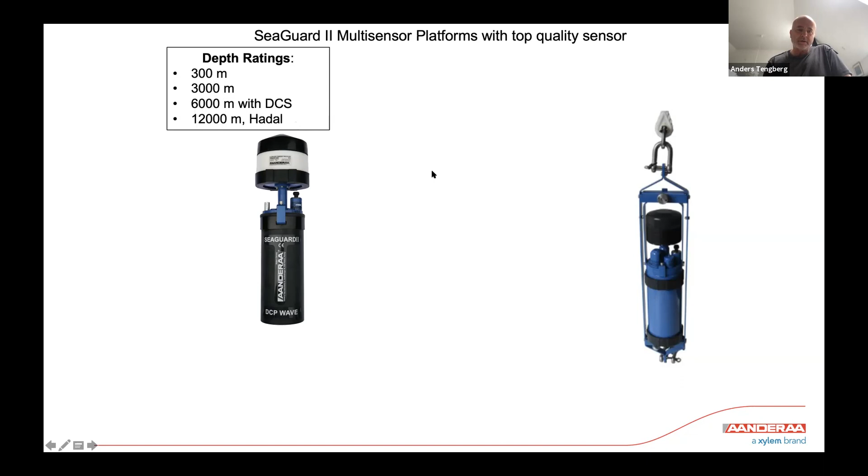There are different depth ratings depending on the pressure cases, and we have 300, 3000, 6000, and then we have a special version which is for Hadal, so it's down to 12,000 meters. We are involved in several really deep trench work projects at this time.

So if we look first at the Doppler current profiling sensors, we have a Doppler current profiling sensor, which I have discussed in a previous webinar when we looked at selecting the right methods for current and wave measurements. It can measure currents in multiple layers above the instrument, in 150 cells, and you can program them to be different sizes. You can go from 10 centimeters by having overlap of the cells to 10-meter cells.

And the user can select whether to use broadband or narrowband. In the previous webinar we discussed this in more detail, and we could see that broadband is suitable to save power and gives you additional information in the measurements. But if you're working from a platform that is moving a lot in the waves, for example from a buoy, then narrowband is, as we have seen, a better option.

You can measure surface currents with it, and every single ping that it sends out is compensated for tilt and movement, and the instrument can handle 35 degrees of tilt without any degradation of the data.

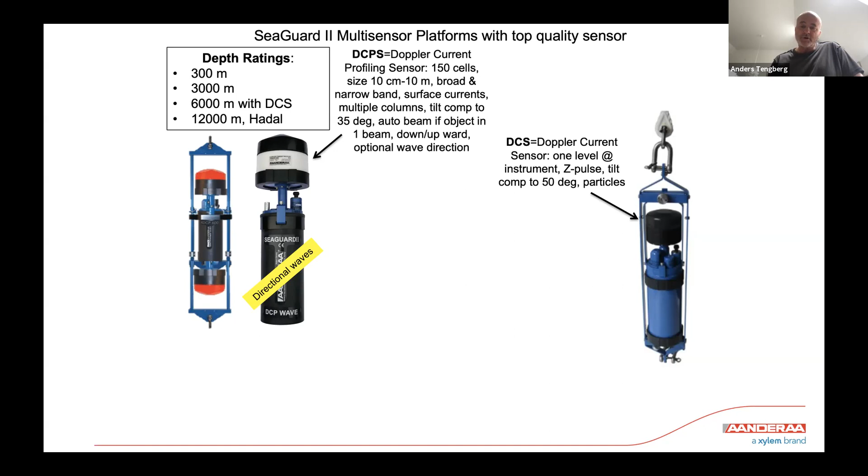And as with all our instruments, they are multi-parameter. You can add sensors. It's plug and play. You switch off the power, you add the sensors and switch on the power, and then it's ready to measure with the new sensor. And that gives the advantage, for example, that you can use the instrument to log sensors on a string. Here you see a shorter string laid out on the deck between deployments. I will show you one or two more examples of that.

And also these instruments can accept sensors from other manufacturers as long as they have an analog output or a serial output. The instrument can take 2 serial sensors and 4 analog sensors.

And I want to point out here what we are releasing this year. It's a series of new sensors which are relevant to the SeaGuard. For example, a new turbidity sensor which can be used on strings, with a 0 to 2500 NTU range. A new conductivity sensor with a factor of 100 or factor of 10 better absolute accuracy, and some new versions of the oxygen optodes, for example, trace oxygen.

And we have one software which is called Real-Time Collector, which handles all our instruments and sensors. So you connect to this software, and then you are able to set up automatically. The software will recognize which sensor or instrument is connected, and you're able to set it up. And we also have features for real time, where you can transmit compressed data, and you can select which data to store on board and which data to transmit. So a very efficient way of sending data in real time.

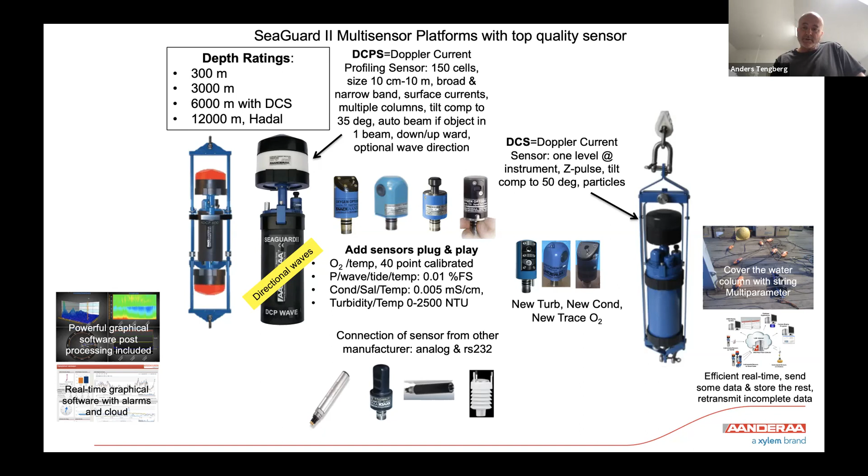And with the instrument comes powerful graphical software, which is included, where you can make different 3D and 2D plots and line plots to have a good overview of the data and easily export them into other formats if you need to do more processing of your data.

Typically these instruments are used on moorings like this here, deep moorings, and we will see some examples of that. You can also have them in a bottom frame. This is typically used, for example, in port and harbor applications. If you want to measure directional waves, we recommend a bottom frame with a gimbal, because to get good directional waves with the acoustics, the instrument needs to be stable and not moving.

One feature of the SeaGuard instruments is that you can put sensors in different logging intervals. This can be practical if you run significantly different sensors on the same instrument. For example, you can put the pressure sensor in 2-second intervals if you want to detect small changes in the sea level, or small movements in the seafloor. I will show you some examples of that.

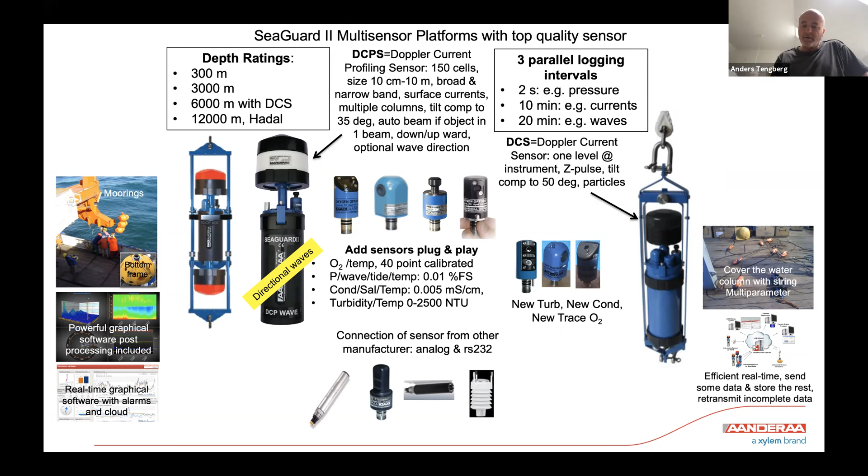And then at the same time you can have a current sensor which automatically pings maybe 150 times over 10 minutes, working by itself on a 10-minute interval, and then maybe you want a longer interval for the waves, and you can put that in a group with longer measurements. So you have three parallel groups with different logging intervals depending on what you would like to do and how advanced your experiment is. You adapt your data for your experiment.

So here are some examples of applications which I will come back to, but basically by having this you have a lot of possibilities of doing different types of measurements.

And here you may notice I've included also a wind sensor, and this is because now in several projects, several customers have a SeaGuard as a logger on a buoy. The SeaGuard logs the surface currents with the single-point Doppler current sensor, and below that the profiling sensor, and then it takes in an external compass to compensate for magnetic disturbances that you often have on a buoy, and also a wind or meteorological sensor which is connected by serial.

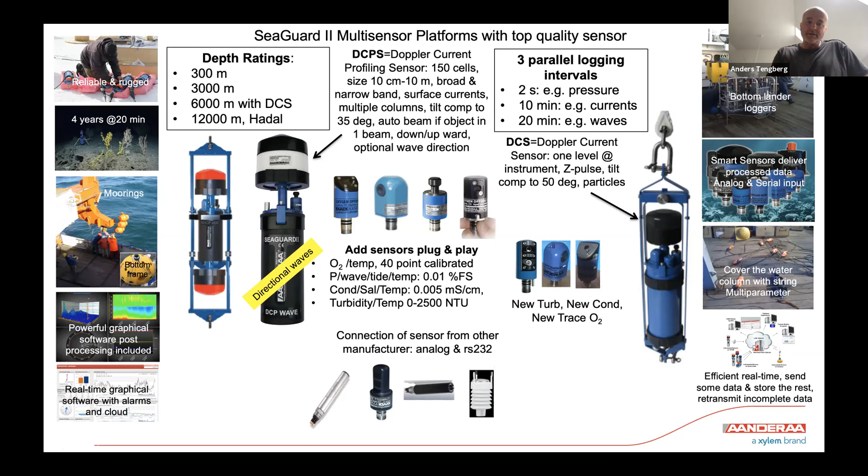So this is also a way to use this SeaGuard instrument, which is mainly, of course, made for underwater applications. So I will show you some examples of how these instruments have been used. I already showed you this project in a previous presentation about currents, but now I will present to you some new data that we just analyzed at the university.

And what we are looking at here is effects of ships, mixing from ships, and how it affects the environment, both in terms of spreading pollution, in terms of gas exchange between atmosphere and water, and in terms of mixing up through the stratified layers. Erosion we don't look so much on; that has been studied abundantly in other studies.

So here are examples from our field work last summer, where, for example, to look at the movement of the halocline, we use small CTDs before and after the ships. Here is an electrical ferry that just passed and we're measuring behind. Here is a big ship that goes between Copenhagen and Oslo in Norway that we also measure behind.

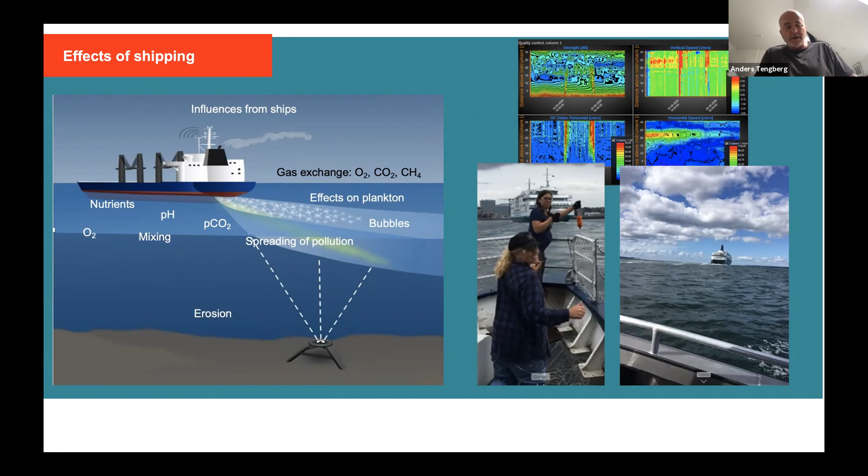So we want to detect the influence of ships, how the ship wake is spreading and how it affects the halocline. And so we deployed instruments here under the ship lanes. We had two Nortek instruments, one Signature 500 and here a Signature 1000 on a buoy. Below the Signature 1000 we had a SeaGuard 2 instrument in its mooring frame, deployed at about 35 meters below the surface and looking upwards, combined with the Signature 1000.

In this case we deployed under the north-going ship lane through a strait here between Sweden and Denmark. There are about 50 or 60 ships passing every day. And we also have ferries sailing about 1.5 to 2 kilometers further north, back and forth between Sweden and Denmark, one ferry every 20 minutes. Some of these are electrical. This one here, for example, is an electrical ferry that charges when it comes into shore.

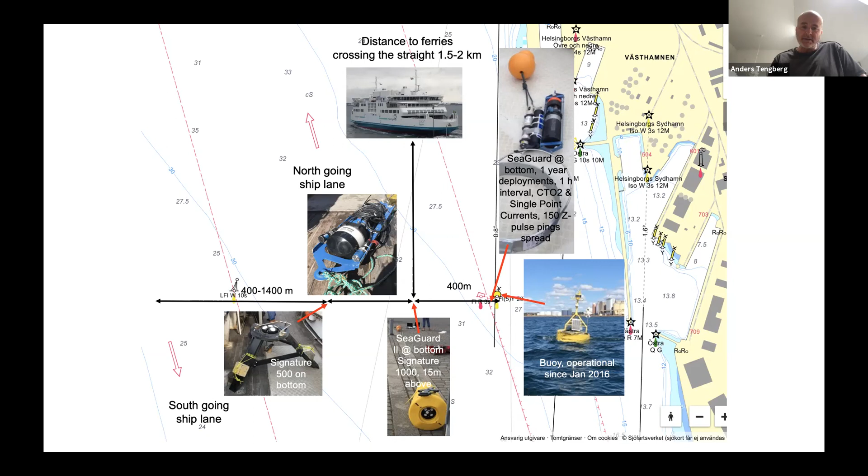So we want to detect ships. We get the AIS data, how the ships are moving, from the automatic identification system, and with that we can see when they passed over our instruments and how it affected the mixing. So here is just a background plot. This is using the freely available software with the instruments, the Data Studio 3D software, where I just make a plot over a couple of days. This is just 3 days. We deploy the instruments for several weeks.

Looking at different information here, for example the vertical currents, we can see the north speed. This is a strait which is oriented mainly north-south. You don't see the scale, but we can see the different layers and how currents are going during these 3 days. Here is the signal strength, the backscatter level from acoustic reflections from the profiler. We can see very strong echoes here. This is fish. We have big schools of fish, herring, moving in the sound. It's a rich area for fishing. There is no trawling here, so there's a lot of fish.

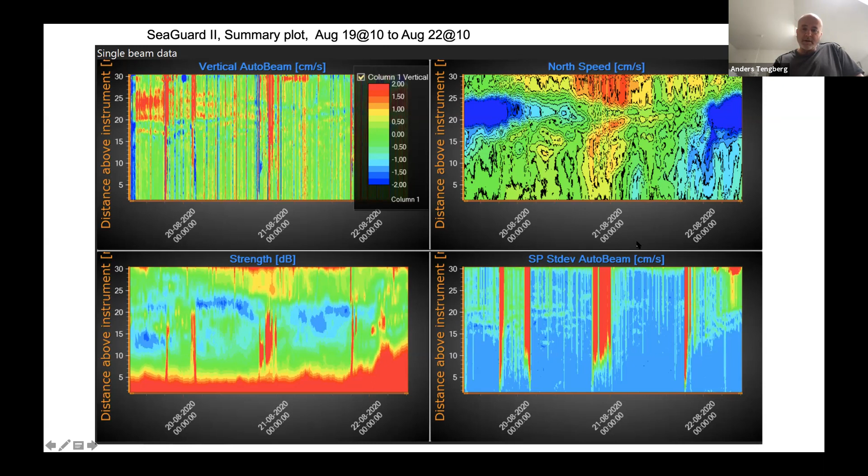And one parameter which we looked at a lot to see mixing from ships is the standard deviation of the horizontal speed. It is automatically calculated by the instrument. So after recovering the instrument, in 1 or 2 hours I made many of these plots, looked at the information, and had a good overview of what happened during the deployment.

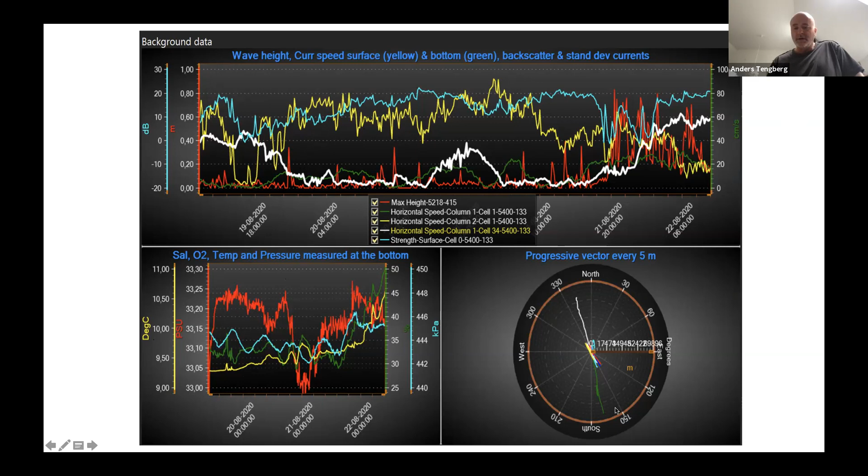In this case, the SeaGuard instrument also had a pressure-based wave sensor on it, so it measured waves. You can see it in red here. Wave height was, for these days, maximum about 0.8 meters. We had salinity measurements at several levels. We had oxygen measurements at several levels. And here you see the tidal measurements, pressure, temperature, salinity, and here are the progressive vectors that show the main currents in different layers are north-south. So this is the direction of the strait.

So if we look at this standard deviation of the horizontal speed, we want to see mixing and influences of ships. Can we detect the ships that are passing?

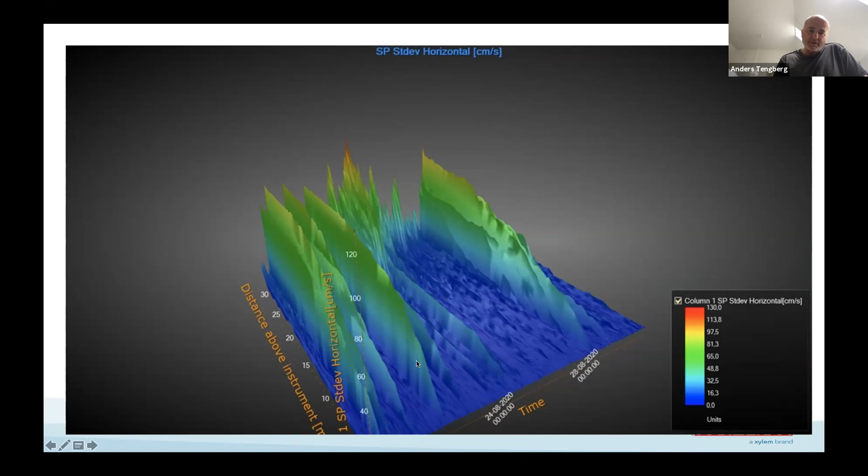Typically, if we make a 3D plot of it, we can see here going from the surface down to the bottom. Here is the time scale. If these are influences of the ships, they go to different depths. We can see here it goes to about 10 meters below surface, then it levels off. Some of these influences only go more shallow.

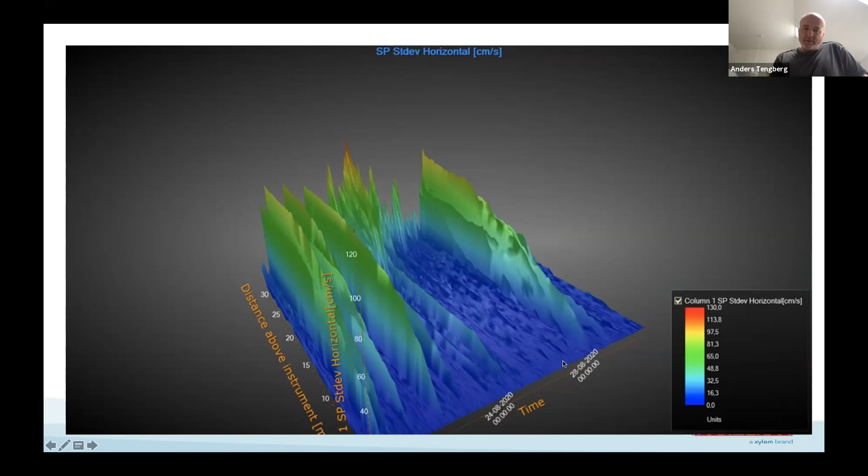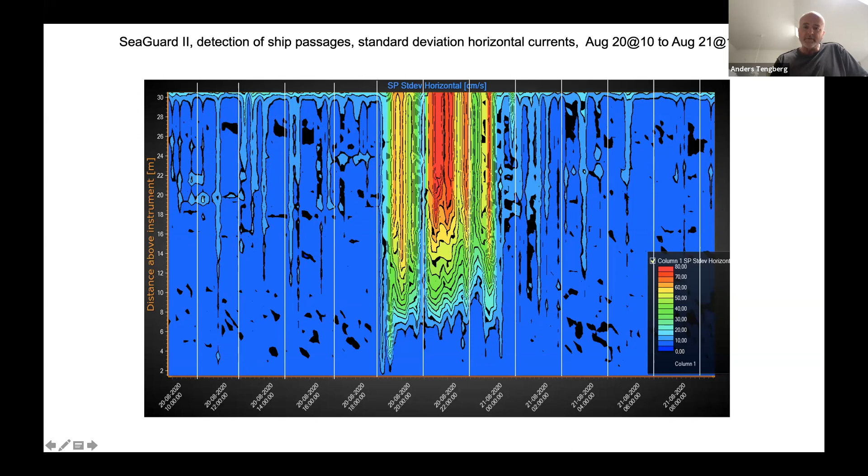And to our surprise, we could see ships, the ferries, for example, passing north of the instrument installation at 1800 meters, at 1500 meters. We could see the effects of these ships as well. So every single detection of such an anomaly in the horizontal currents, a turbulence, could be correlated exactly in time to a ship passage, except one actually. We suspect that this ship did not have the AIS on, because that one we didn't see.

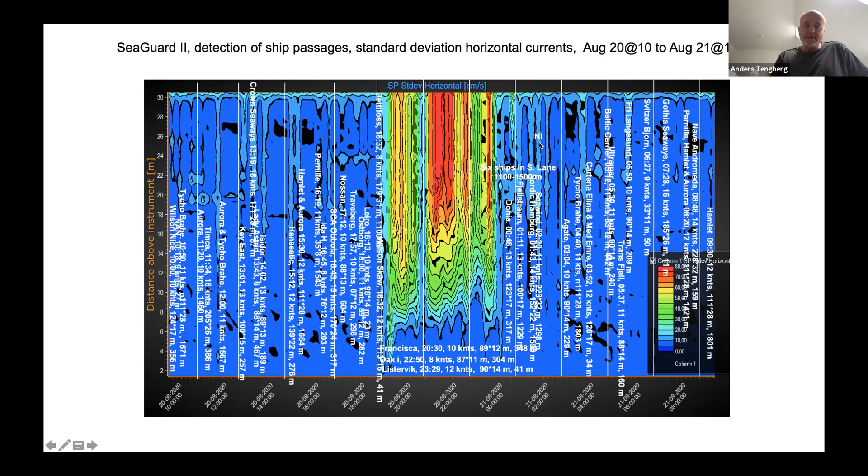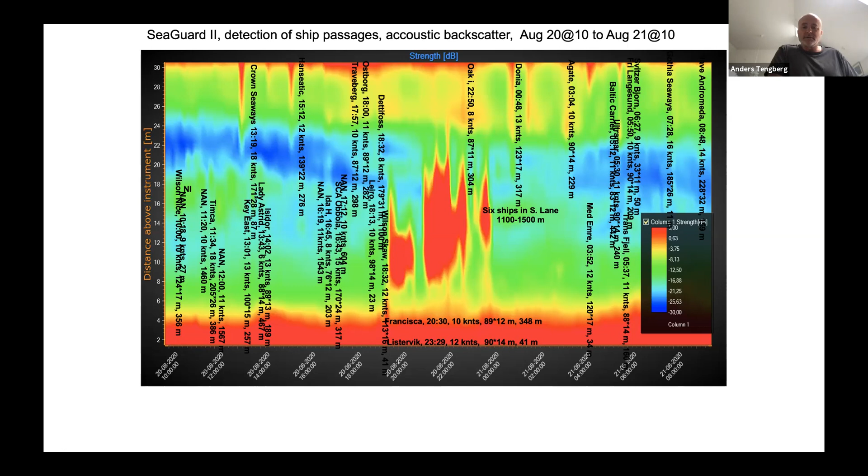If we then also look at the same thing, but directly from the signal strength, from the acoustic reflections, we see that ships that pass straight over the instruments or very close can be detected, and that's probably the bubbles from the ships that we see. So we could detect them, but only the ships that pass within 200 to 300 meters or so.

And in the next deployment that we will do this summer, instead of going out and doing a lot of CTD casts, which takes a lot of time and it's difficult to get good coverage, we plan to deploy the same instrument with a string of sensors. This is a string that we have available from an observatory that we have been running for the past 10 years or so, and that we have now recovered. Then we will get the halocline automatically measured, because the string has oxygen and salinity sensors on it.

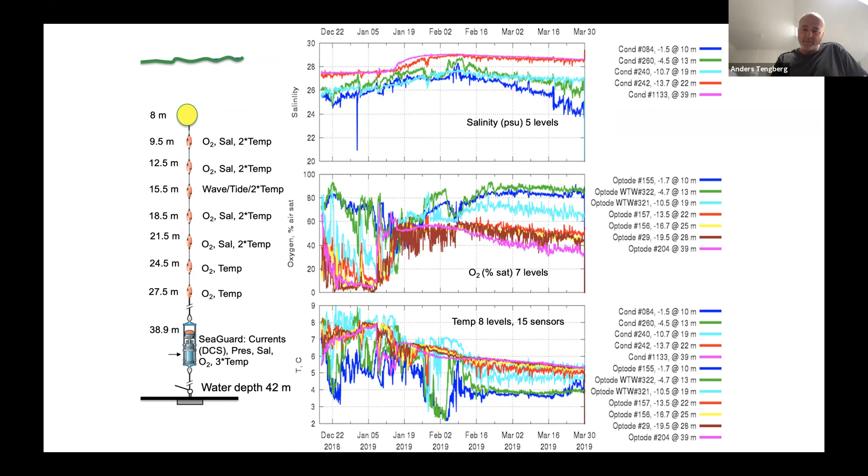So, combination of acoustics and other sensors we discussed in the previous project here, and one case where we combined sensors in a really useful way was this project I showed you in the previous presentation as well. That was combining turbidity with acoustic backscatter.

Here is a project where we look at effects of trawlers passing in areas where they dumped chemical ammunition, how trawlers resuspend the sediments, and how the fine particles from the sediments spread with the currents. Here we deployed two instruments like this, with bottom weights and the instrument in a frame with an acoustic release below and floats. This was at 200 meters depth.

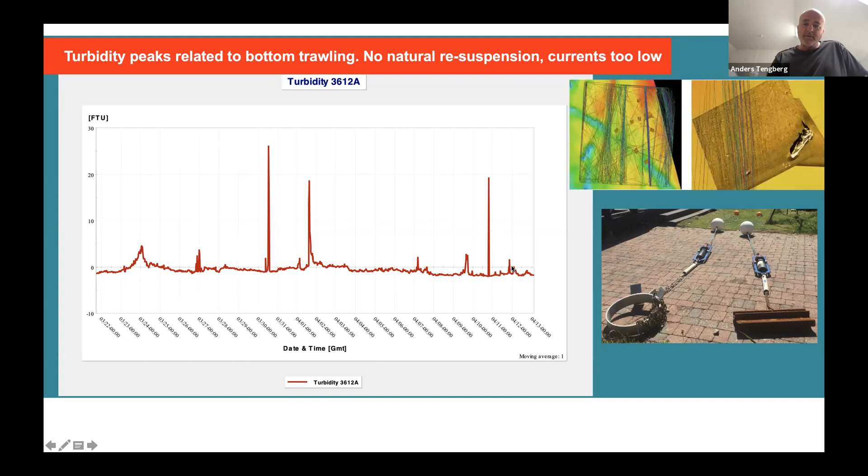And we can see here all these peaks are completely related to trawlers. We have AIS data from the trawlers passing by, and here we see trawl tracks in the ammunition dump site where we have wrecks which were sunk full of mustard gas. And if we combine the turbidity measurements that we saw in the previous slide with the acoustic measurements, we get a good idea of how high above the seafloor the particles are spreading from the trawlers.

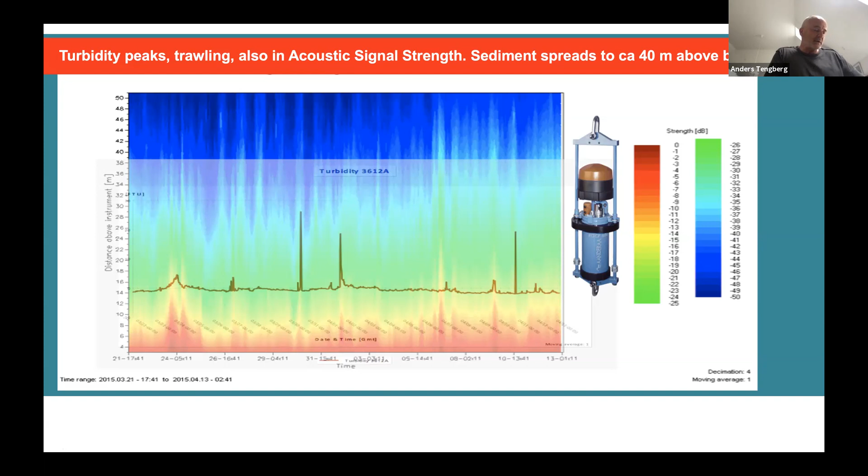And so the turbidity kind of gives you a calibration point for your acoustics, because turbidity is a better way of measuring mineralogenic particles in the water than the acoustic reflections. And by putting two turbidity sensors, for example, at different levels, you get an even better estimate of how many particles are resuspended by the trawlers. In this area, currents were not high enough to resuspend the sediments naturally, so it was just resuspension done by the trawlers passing by.

Now I pass on a little bit to experiments or measurements done with single point current sensors, still using the same SeaGuard instrument, still using multi-parameter possibilities. The thing is that with acoustic profilers it's very difficult or impossible. We have never managed to do any serious absolute referencing of the current measurements, because in a tow tank, which is the best method, we see here an example of that, the acoustic profilers will have a lot of reflections against the walls. It will be affected by this, and the water in the tow tanks is often quite clear, and that also gives difficulties in getting good profiling measurements.

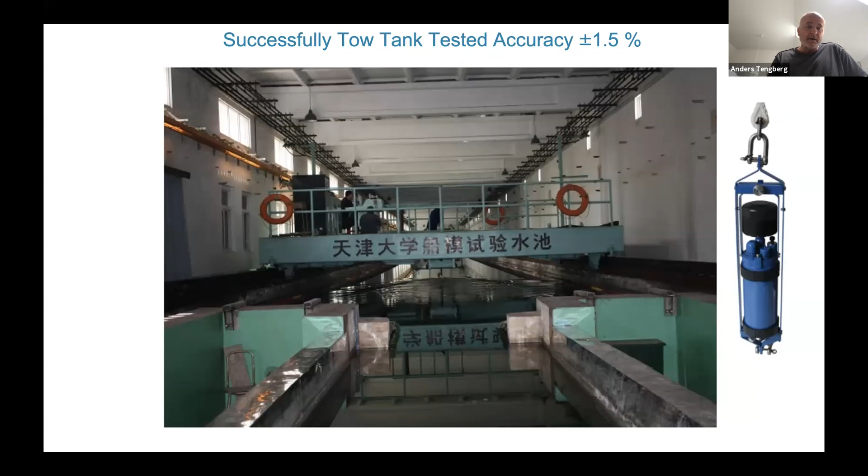But for the single point instruments, our customers have done a lot of tow tank testing, and here is an example of that from China, at the university in Tianjin, outside Beijing. They have tow tank tested many of our instruments, they do that routinely, and the results show that the quality of the data of the SeaGuard measurements is really good. And here we see the relation between the trolley speed, which is the reference, and the speed measured by the SeaGuard instrument.

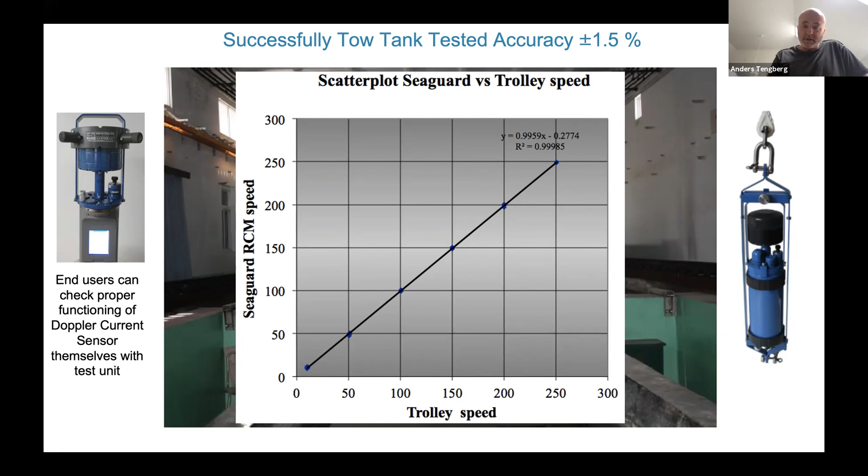And one thing that we try to do with all our sensors and instruments is to have methods for the customers or end users to test that the instrument is technically functioning correctly before and after deployment. And here for the single point we have a test unit which you put on the head, and then you can see if the transducers are working well, and the tilt compensation and the compass is working as it should.

So single point instruments have been used in many applications, and here we have one example. This was presented at the EGU meeting by Pierre-Henri. They deployed an instrument in the Marmara Sea, a seismically active area, as you know, close to Istanbul, Turkey. There are a lot of earthquakes here, and it was on a bottom lander frame. After some time came an earthquake, and a turbidity current was triggered by the earthquake. It came through the canyon, and the lander tipped over.

And here the SeaGuard really gave a lot of useful information, both by the very sensitive pressure sensors that can log at high frequency, while the current sensor was giving the tilt of the lander. It was giving how much particles were in the water, and you also had the other measurements in parallel. There were also quartz pressure sensors on board, but they were not behaving as well, as they had some damage, and they are orientation sensitive. So the SeaGuard was giving really good information about what happened when the earthquake was triggered. This is now being presented in a scientific paper, which is not yet published.

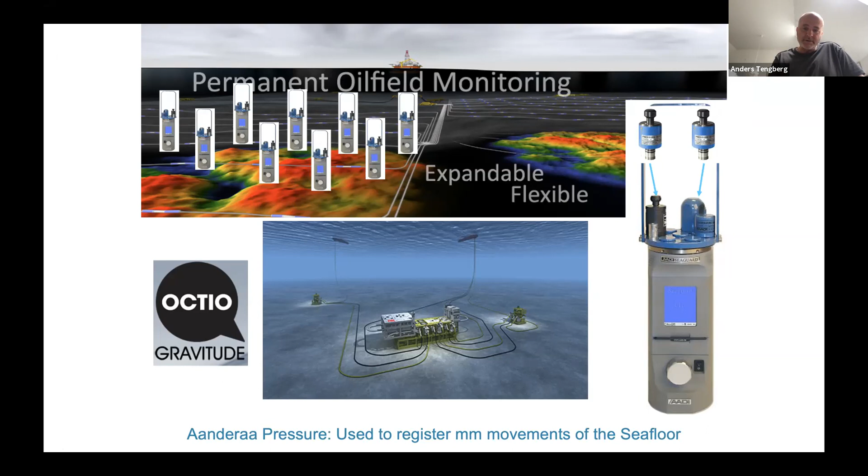So that was an example of using pressure sensors to look at variations at the seafloor. Another application is in the offshore oil industry here from Norway, where many SeaGuards and many of these ultra-sensitive and very rugged pressure sensors are used to detect millimeter movements of the seafloor. These are surveys of the oil wells to be sure that they are not collapsing or increasing. So they need really high accuracy and high stability of the sensors. Normally 2 pressure sensors with different ranges are put on SeaGuard instruments, and they place many around the oil wells. I think this customer has about 200 SeaGuards with dual pressure sensors. So that was just to measure seafloor movements.

Here is an application done by NOAA at Hawaii, where they look at conditions for deep water corals. These are growing at 200 to 300 meters in the Hawaiian area, and here they deployed the SeaGuard to look at conditions at the site. It was placed by an ROV and was supposed to be recovered after 1 year, but there were some issues with ship time, so they couldn't recover it. So they came back after 4 years, and it turned out that the SeaGuard had recorded 1,014 days at a 20-minute interval.

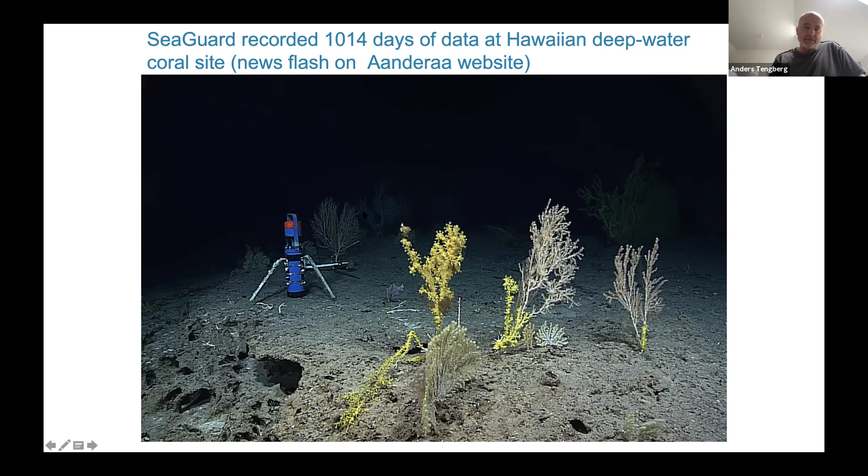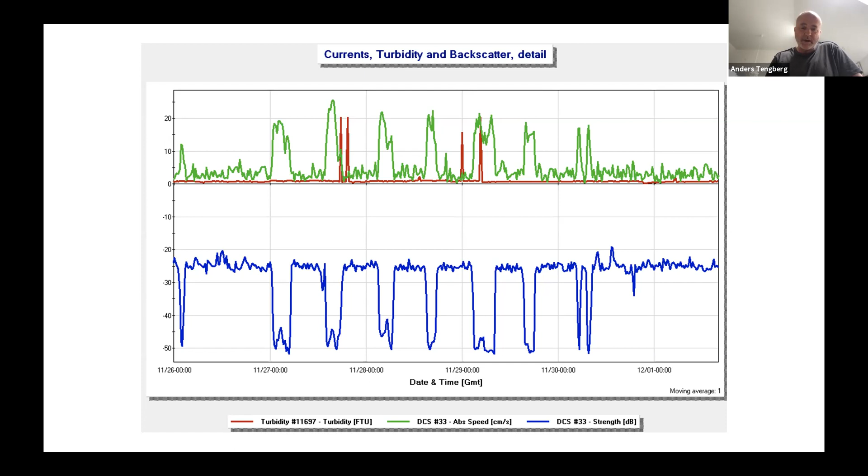And these things happening here, they could then see and model that this is upwelling from deeper layers with much lower particle concentrations in the water. The turbidity here was not really giving any good estimate of that, but the backscatter did, and they could see how deep water with much lower particle concentration and much lower biological activity in it was upwelling occasionally.

And this thing to correlate turbidity with backscatter, so turbidity measurements, which is an optical reflection, with acoustic backscatter from a higher frequency instrument like the single point Doppler current sensor. Experiments on that were done in German rivers, where the German Wasser- und Schifffahrtsamt use about 160 SeaGuard instruments with turbidity, salinity, oxygen sensors and current sensors on them to measure continuously in the area where the big harbors are.

Here is Emden, and there is also the Elbe River where Hamburg is lying, one of the biggest harbors in Europe. And they use this data to model sediment transport and plan dredging activities. But one issue they had was that during longer deployments, turbidity sensors tend to get affected by biofouling or things floating in the water like algae, and eventually results will get biased or drift because of that.

So we looked into the correlation between acoustic backscatter data and turbidity data. On the upper panel here, you see turbidity variations quite high, from a little above 0 up to 1000 NTU, oscillations here with the tides. You can see at the lower panel east currents and north currents. So currents are going in and out of the area here, driven by the tides.

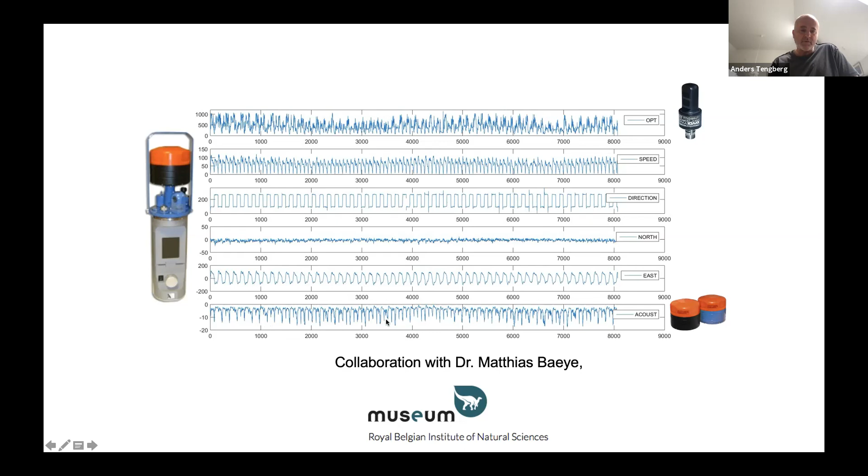And here we see the direction. It's completely tidally driven, and you see the speed here from low speed to about 130 or so maximum speed. And at the lower panel here, you see the acoustic backscatter, where lower minus levels are lower levels. So if you put the optical turbidity measurements in logarithmic scale and compare them with the acoustics, you get a correlation

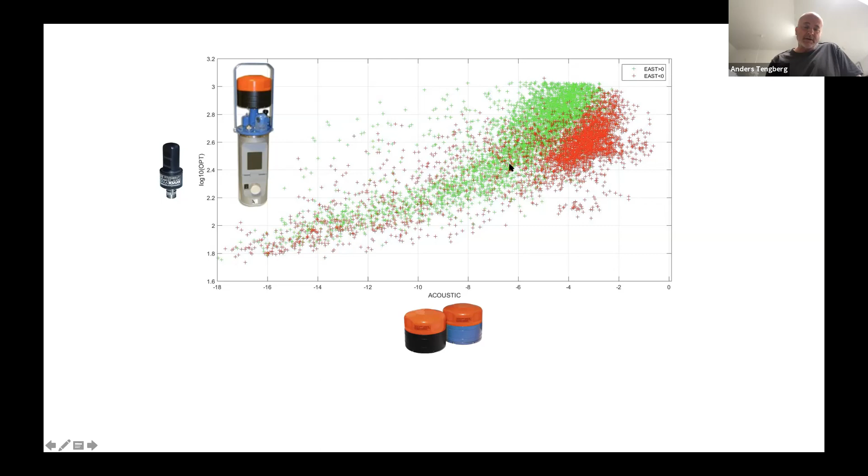which is quite okay, and which gives the possibility, because the acoustic sensors are not sensitive to biofouling, to go for a very long time without any issues. So in this case, it gave the users a good possibility to use data even after the optical sensor had some biofouling issues. And I want to show you also one example of where this acoustic backscatter could be used to look at relative particle changes over time.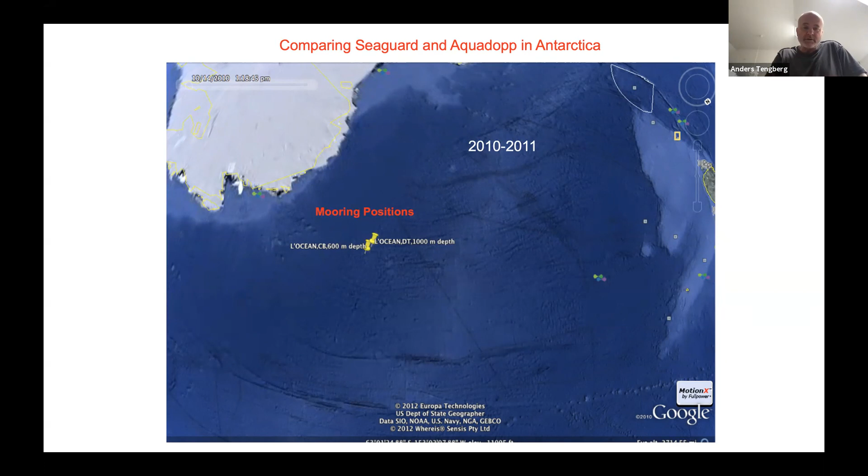And finally, I want to show you some data from Antarctica, and here is just a comparison. The challenge here is just to make long deployments, because water is very cold, and also water in the Antarctic winter time is very clear, very few particles in the water, so that's a challenge. And then another challenge is that the magnetic fields here are very weak, so it's questionable how well you can trust the directional data.

Here it's measurements done by L'Océan in France, and that was done several years ago. It was 10 years ago. And here they have moorings. You can see moorings here with floats and sediment traps and different instruments. There are SeaGuard instruments on the moorings. There are also Aquadopp instruments from Nortek on these moorings.

And they were deployed typically for 1 year at a time. But in some cases they could not recover because the ice conditions didn't permit that. So they had to stay down for a longer time period, about 14 to 15 months. And here I just plotted and compared some data from an Aquadopp and the SeaGuard that was deployed and redeployed.

So in this case, blue is the north component of the SeaGuard. This is over a 2-year or 26 months deployment period. First deployment period was about 12 months, second was about 14 months. And red is the Aquadopp measuring, and as you can see, the Aquadopp had a three sensor, and it was typically working for about 5 to 7 months.

The SeaGuard instruments were always running. They had, in this case, 8 sensors on them, and so they were all the time delivering data and could handle the cold water. And there are some differences here in direction. The SeaGuard instruments, when being redeployed, we see that they don't change the direction. Here is a redeployment. So we have these solid state three axis compasses, and as far as we could see, they work well also in this environment with low magnetic fields.

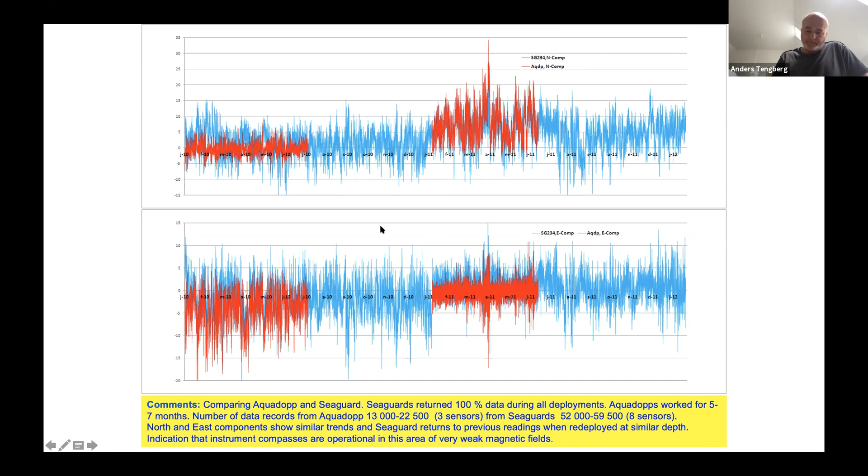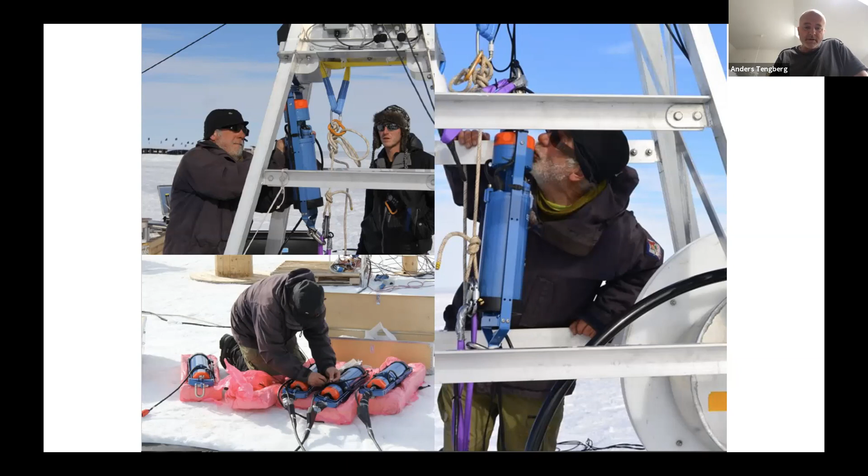And then finally some slides on another Antarctic deployment. This is a deployment which will last forever, because once the instruments are installed, they cannot be recovered. These are SeaGuard instruments installed and interconnected to each other, installed through the ice by drilling. So by drilling through 700 meters of ice with hot water, and then the instruments are installed through the hole, and after a week or so the hole freezes over and you can never recover them again.

So these instruments here were installed about 10 years ago and have been working since that time, and they measure currents, single point currents, salinity, temperature, oxygen. And there were, in this case, 4 instruments on a string here going down. And what is studied here is the melting and freezing processes of the ice shelf, to see if the ice shelf is increasing or decreasing, and what type of circulations affect the increase or decrease of the ice shelf.

And this is a project from University of Bergen, Svein Østerhus, who has been doing a lot of Antarctic research for the past 30 years or so. Real-time data is sent back by satellites, but that has been working on and off. It runs out of batteries for the transmission about 6 months every year, and the instruments have been working all the time, and data are also stored as a backup here on the surface of the ice. So with this, I would like to say thank you for listening.